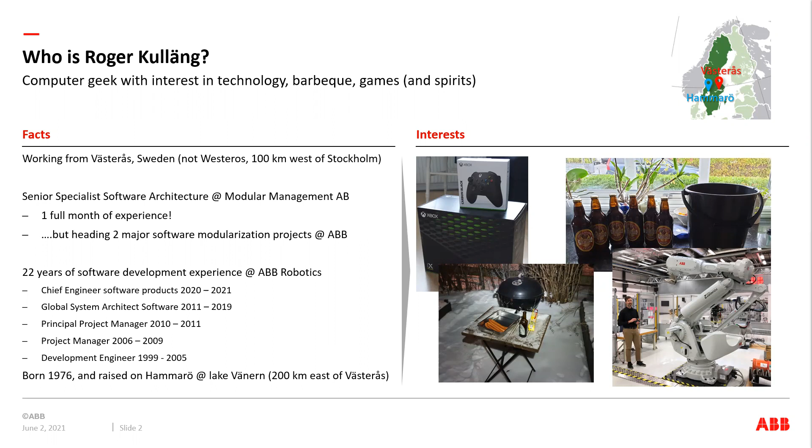The bucket on the image is actually when you do your own glögg in Sweden. Very interested in these different things. I also think that this is a pretty good quote of Niels Bohr back in the day, that an expert is a man who made all the mistakes which can be made in a narrow field, and that's basically really how I feel. I've done a lot of interesting mistakes and learned from them.

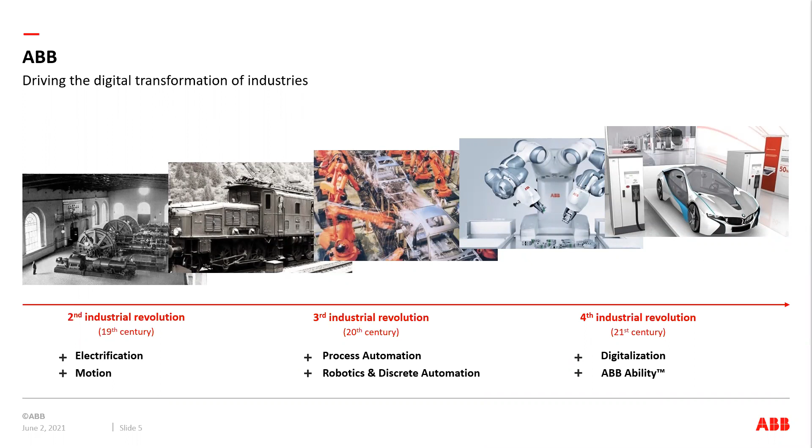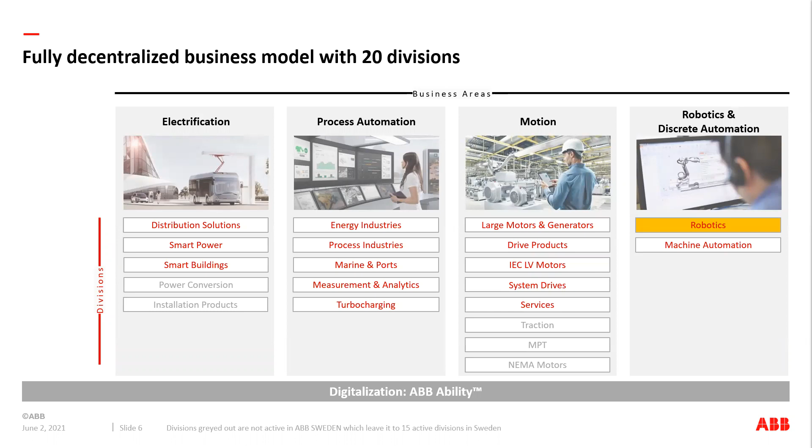Let's take a short recap of ABB Robotics in case you're not aware. ABB, pretty large company with a very long heritage, 130 years in the business, starting with electrification. But in recent years, more focusing on automation and the fourth industrial revolution. And robotics then, it's a division now in ABB organization, as you can see on the right-hand side. But there's 15 active divisions within ABB that is in Sweden.

ABB Robotics actually started in two times, in Norway in 1969 with the first paint robots, but also almost more known, the first electric robots in 1974 here in Västerås. And since then, we have installed over 500,000 robots worldwide, and are located basically all across the globe.

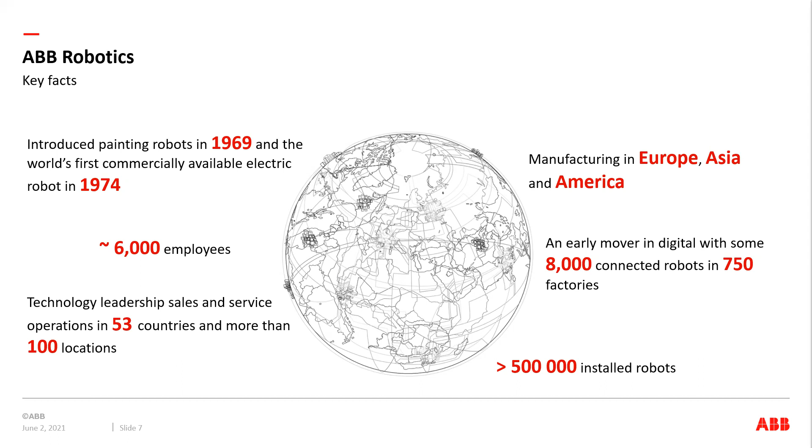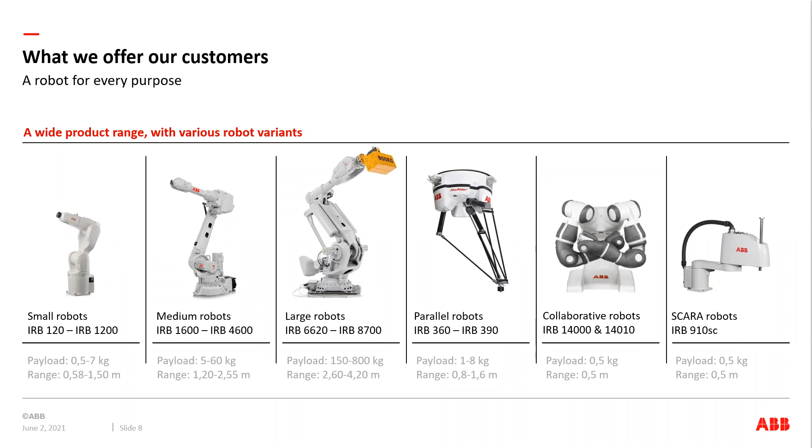What ABB does is basically a robot manipulator for every purpose, but also then the application that the robot is doing, as well as other process equipment. The key thing for this meeting is that all of these robot arms are controlled with one control system.

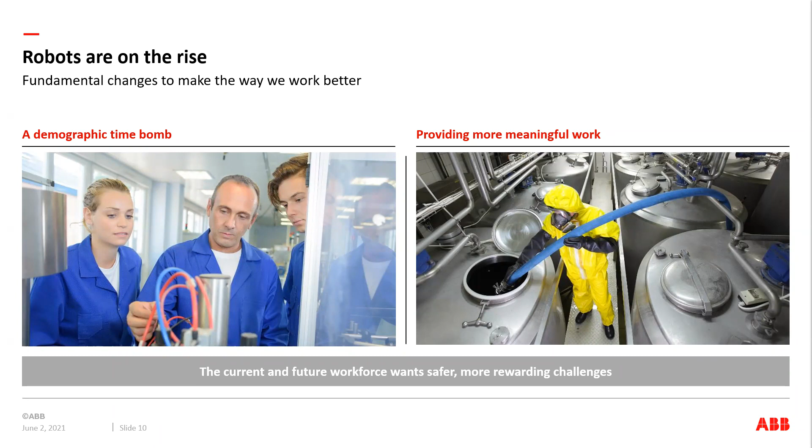So if we look at the future outlook for robots in general, I think you're all aware that we have a demographic time bomb in some countries where there's an aging population and we need to replace them. Also, robots provide more meaningful work for people. But also, I think that the entry barriers are going down.

Previously, robots has been in automotive for a very long time, but now we're seeing that even small firms are deploying robots at a much higher rate, specifically in the collaborative workspace where you work side by side with the robot.

So making it easier to install, and these robots are increasingly important. Previously, you could have like a full division that only did robot integration at these big automotive companies, but that's not the case if you look at the grocery store downtown. That really is not viable anymore.

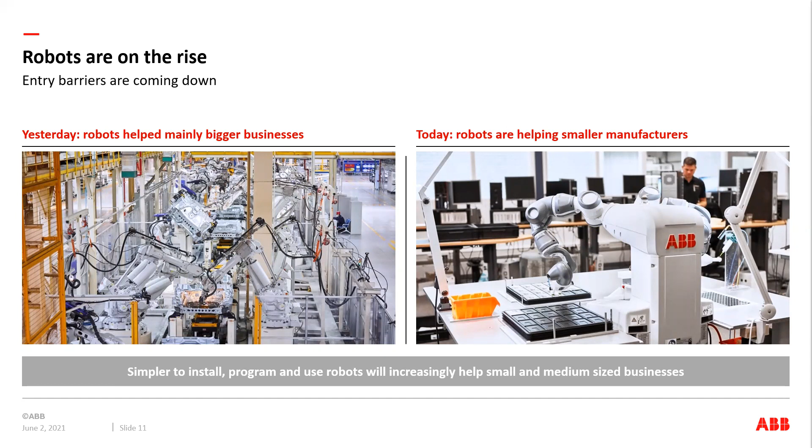Also, the scaling factor is really where robotics come in, where you produce a lot of things. And this has been the case for a long time, but also now there's mass customization that we're seeing across the globe. So even if you don't have a high volume of a specific product, you have a customization possibility that makes the product really have a complex manufacturing in pretty large quantities, and you need to reprogram often.

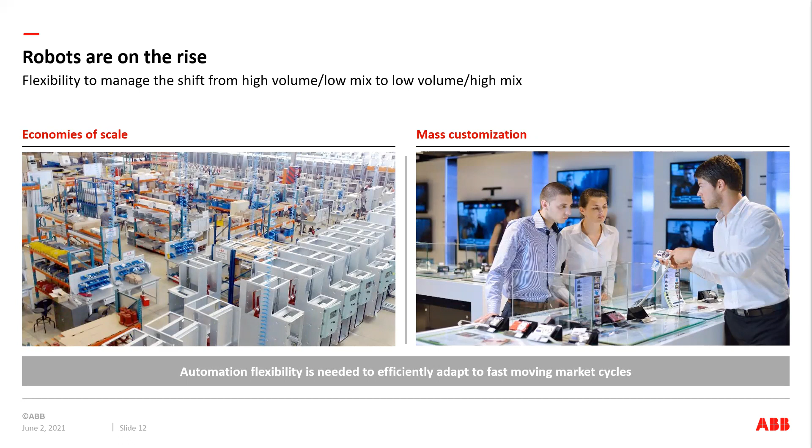If you look at, for instance, the mobile phone world, they reprogram the robots every third month. And if you look at automotive, they previously did that every third year. So there is really a paradigm shift in usability for a robot in the entire life cycle.

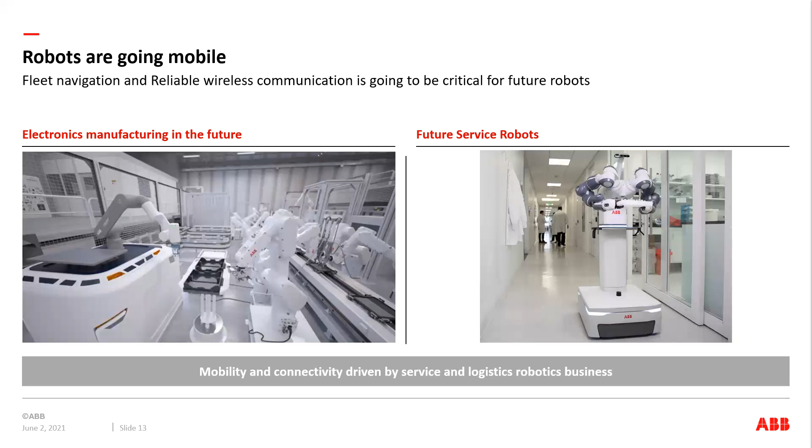Also, what we're seeing is that the robots are becoming mobile, and this is just examples of things that ABB are showing. Mobile robots, both in electronics manufacturing, but also in service robotics, is increasing. And therefore you need to have a much higher rate of mobility, and the connectivity part is extremely important because you can't have wires hanging out of the robot. That makes no sense. So ABB is of course involved in a lot of these questions around these things.

As I already hinted, the user experience is shifting. On the left-hand side, the user experience to do a spot welding is very different from the user experience to program a collaborative picking. In the leftmost case, you fence out the robots. It's a dangerous machine. It can for sure hurt you.

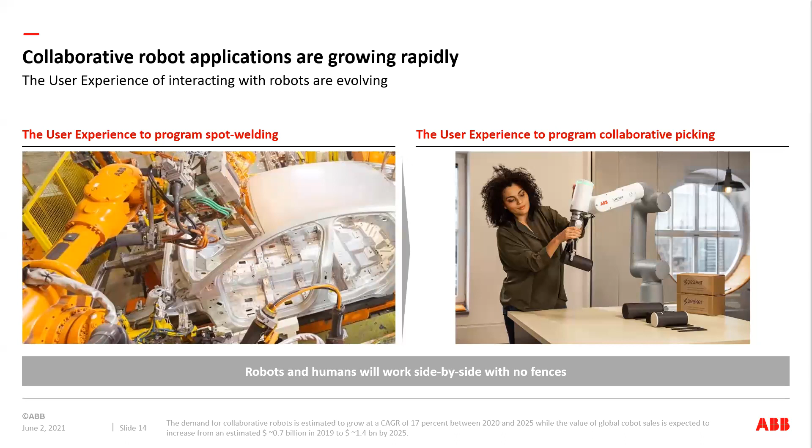ABB, as basically all automation companies, are connecting stuff, so connected robots is ongoing. I already hinted that ABB has somewhere close to 10,000 robots already connected, and that will of course not decrease, it's going to increase. Paving way for digitalization and what you can do is something ABB is focusing on.

So that was a short intro to what ABB is doing. I left ABB a month ago, but I don't think it has changed so much since then.

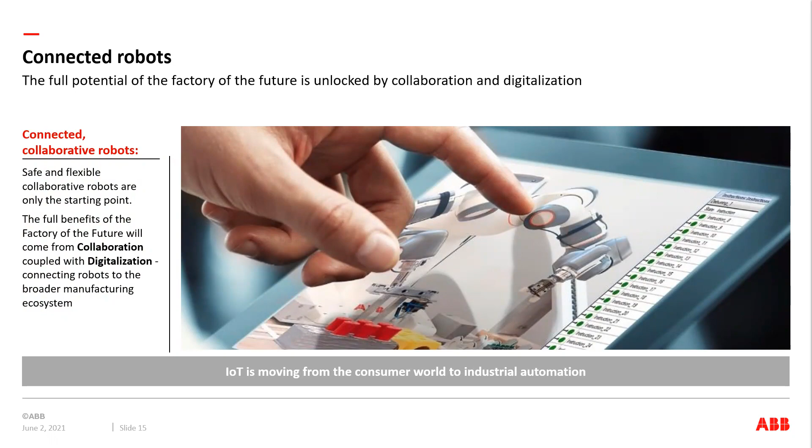So if we look at the software in an ABB robot controller, let's start from where it was born. RobotWare 0.1 was the first version of the current generation of software. It was first released in 1994, but development actually started in '92. This was the first time ABB was using the new C language to program the machine, and there was a bit of Fortran in there too. The previous generations used assembly language, so the productivity was much greater.

Fast forward to what we have today. The OmniCore controller family was first released in 2019. The CPU performance is greatly increased, as you might spot, and the development languages have improved pretty greatly. Now basically all the boards that we had previously have been integrated into one silicon.

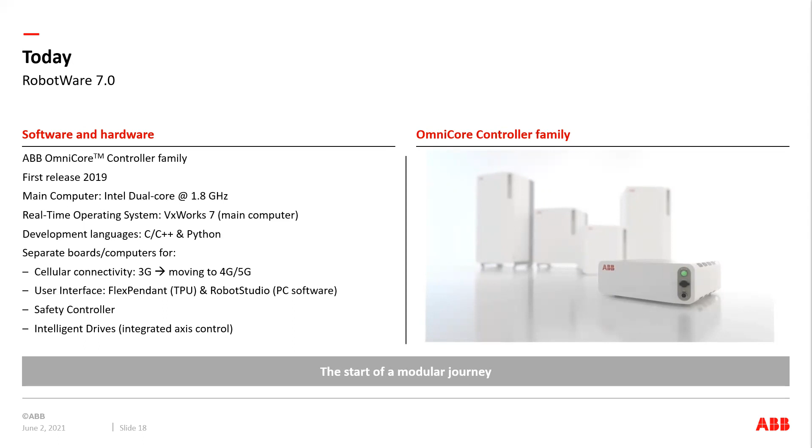The RobotWare software is a pretty flexible piece of software where you have both advanced robot control and a very advanced IO system. You have, as I already hinted, integrated safety with support for safety field buses. There's a programming language called Rapid, and then there's a lot of connectivity to other systems, both IoT and industrial, and now lately this cloud connectivity with cellular connectivity, etc.

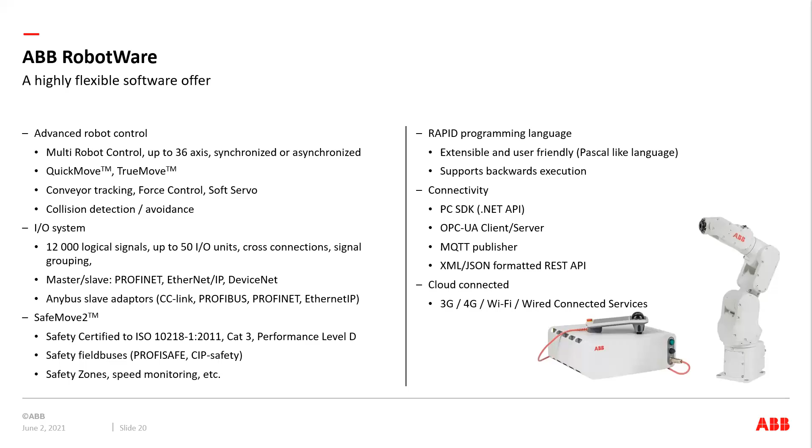So very flexible, everything sounds great, right? So why would we want to refactor this device? Well, there are some issues too. We did this modularity investigation and looked at customer values.

Some of the highest ranking customer values — what our customers valued highest for choosing an ABB robot — were the ones on the left-hand side. The problem was that in some cases they rather lived with problems instead of upgrading the software, because there could be side effects in upgrading. The motion performance of the robot would actually be affected if you upgraded it.

Also, it took a pretty long time to get your features. If you weren't a German car manufacturer in the Munich area, you basically had to wait forever to get your features in there, because the response time was long — same goes for bug fixes.

Then the software also came in one size. All software assumed the controller had one footprint, and if we scale down the hardware to fit in a smaller box, the software still assumes it's in this large box with all the features available for the large system. And lastly, it simply was a very, very time-consuming thing to upgrade the software in the robot.

I said you want to look at all the features. So what we also did was look at the entire life cycle for an ABB robot controller, starting with how you actually sell it, produce it, install the software, program this device including setting up I/O, etc. Then running the production, which is like 99% of the time the robot should be active, as well as maintenance - how do you upgrade, how do you give service?

And then lastly, something we've forgotten for a long time, is also decommissioning. Is there a second life for this product? Is this a robot that will be shipped somewhere else? Or do we need to erase data here for privacy reasons in the robot, etc.?

So when we did all of this, we looked at 22 different customer values, 138 features - I'll give an example: motion control, moving the robot from point A to point B, that's one feature. So there are 137 other things a robot machine is doing without moving the robot. That's something to think about - just doing motion control is not what robotics is about if you look at industrial use cases. It's a lot more. That generated 138 different product properties and 400 technical solutions.

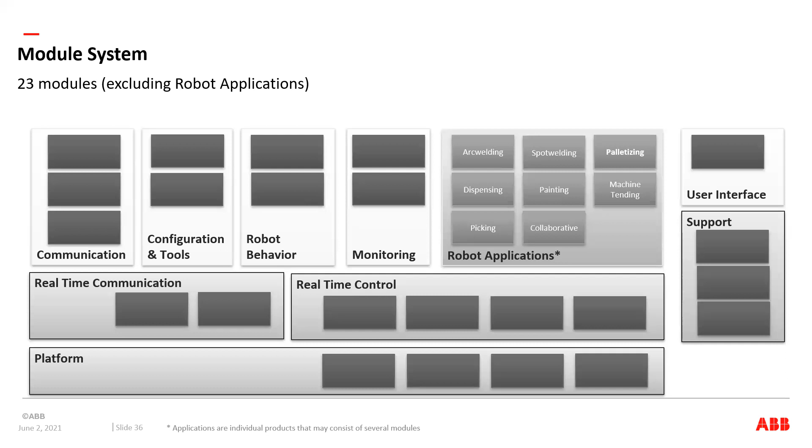Another interesting aspect is the modularization approach. If you look at the entire software, it's millions of lines of code. So how do you start? Well, start from the top and the bottom, because that's where the biggest business impacts are.

Getting this hardware separation so you could innovate faster with new hardware, as well as getting a separation on the user interfaces and external APIs, because that's really where you see the biggest technology push. If you start there, a lot has been gained and a lot of business value has been generated.

And then you continue like that, from the top and the bottom, so that in the end the legacy parts are really small. That has other benefits too, like that you don't break the build dependencies, because that could be hurtful.

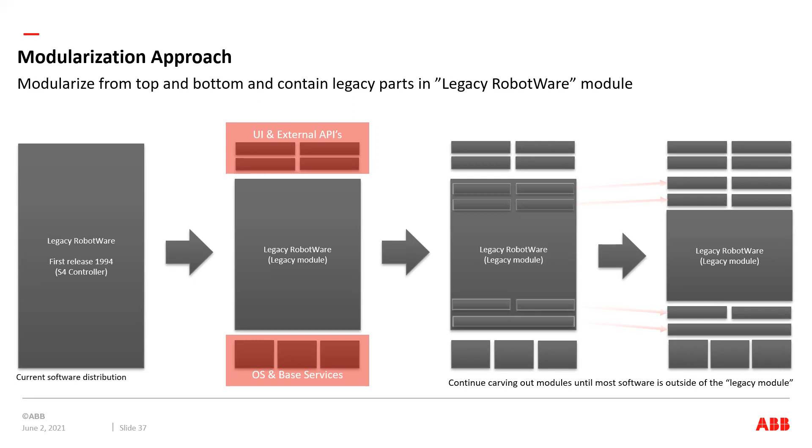What the Omnicore controller has that previous generations don't is a separation of the applications. There's an operating system, there's a basic robot control platform that actually does the robot application. Then you have support for different robot arms, and you put the different applications on top of that, as well as provide tools so a customer or integrator can actually build their own application.

Examples of applications are shown here, so we're on the same page. You have the traditional ones, including collaborative. There's separation here so they can be accelerated to release customer value without affecting the platform.

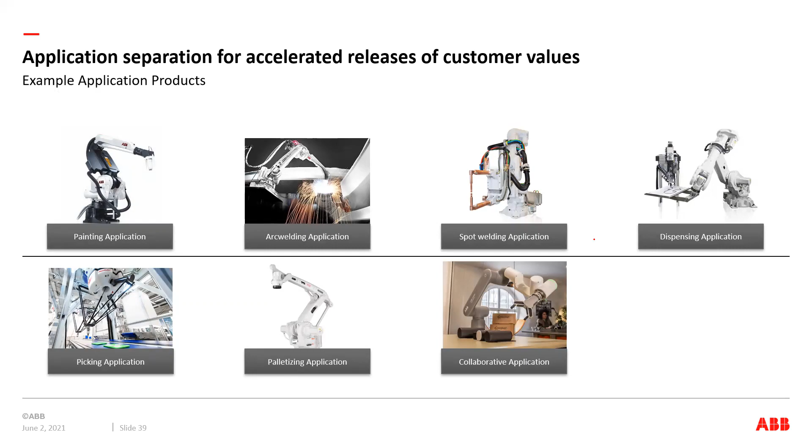So great, modularization then, great news. Is that all? No. To make sure you actually refactor without causing a mess, we also looked at testing.

ABB has something called DynTest. The problem statement is: can we shorten the test period? A bug introduced during testing might otherwise be detected much later, like two months later. And in many cases, if you're given a bug two months later, you might not even know you were the one that wrote that code. That's how long it can be.

That also means solving it is time consuming. But it could be worse, it could just be a side effect, so you actually don't know what the bug is. It's just a side effect of another implementation.

So DynTest is about fully automating the testing procedure during RobotWare development. It should start every night automatically and select relevant use cases using machine learning technology. Depending on what you changed, the software will run a different test scenario.

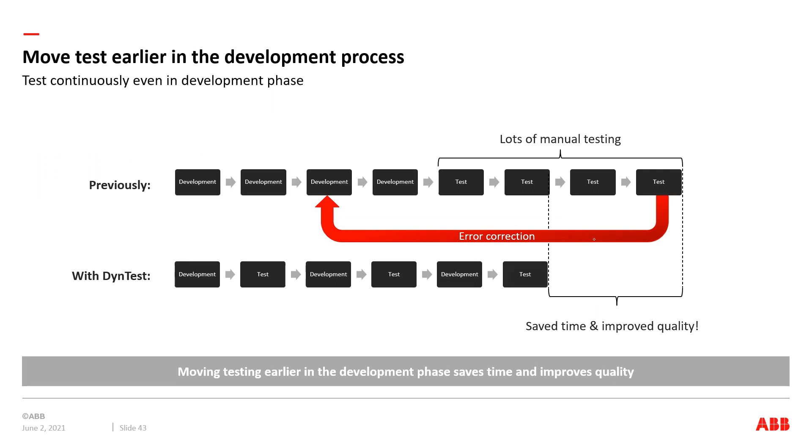What's the benefit? Previously you had a long development period and then lots of manual testing at the end with error correction. If we can do this more dynamically, you save a lot of time and also improve the quality.

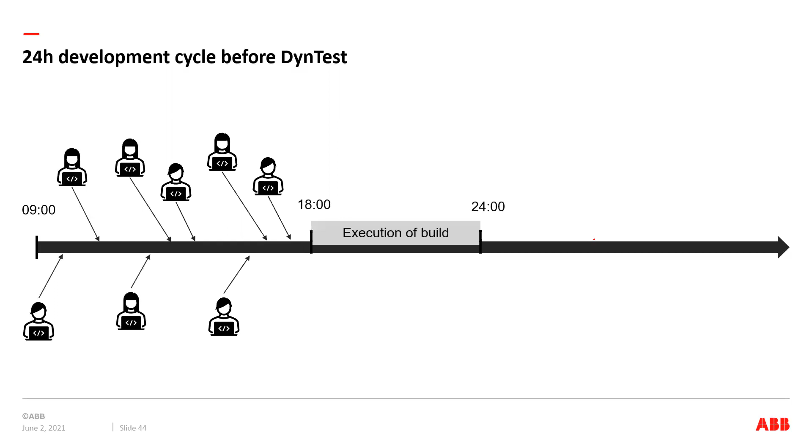If you look at the 24-hour development life cycle: developers start at 9 in the morning and begin checking in code. Then at 6 o'clock the build is started, and typically the build takes a while. Then at 9 o'clock the next morning, you inspect the build.

That gives you 6 to 10 hours of development, but leaves 14 to 16 hours available for build and testing. Since the build takes 6 hours, you have 8 to 10 hours available for testing.

What has been implemented, or is being implemented, at robotics is an automatic build that gives you a response already in 3 minutes. If that passes, we do an automatic subsystem test of the modules, which should complete within 6 hours.

Then we integrate that on hardware, so within 24 hours you should be able to get a result on the code you checked in, on a real machine, in different settings too, giving you confidence when you refactor that you don't make a bigger mess than before you refactored. And of course, there's a lot of money to be earned by doing this better.

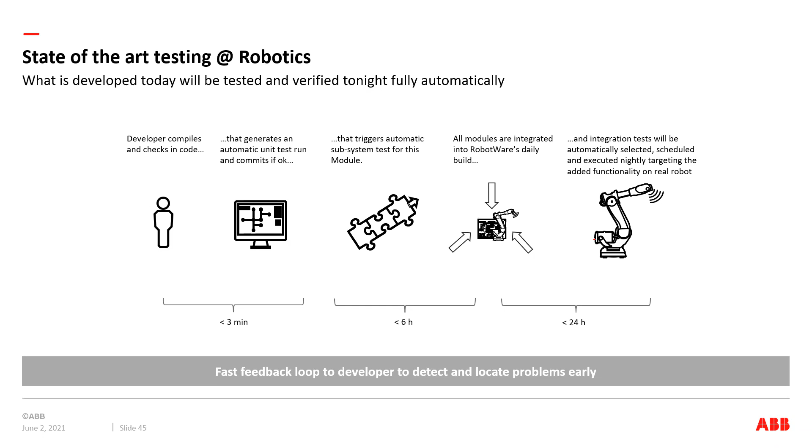ABB also looked at how to change the way of developing code. With monolithic releases, releasing is pretty hard and you don't want to do it so often. But if you modularize this, when you want to introduce something new, like this robot arm, you only change the module related to the robotics arm. You don't need to change everything else. Then you can release a lot easier and more often.

The problem with this waterfall approach is that you spend so much time on requirements that by the time you've done the design and verification, the requirements have changed. This is typically the case, and that makes nobody happy. So what ABB has looked at is implementing the scaled agile framework.

It's an agile development framework that has been adapted to cope with industry needs. It scales so you can have one or several agile release trains. The idea is you have a prioritized backlog, and you create an increment backlog that's supposed to cover 10 weeks. Then the teams pull from this backlog into their own planning and iterate so you have a result every second week.